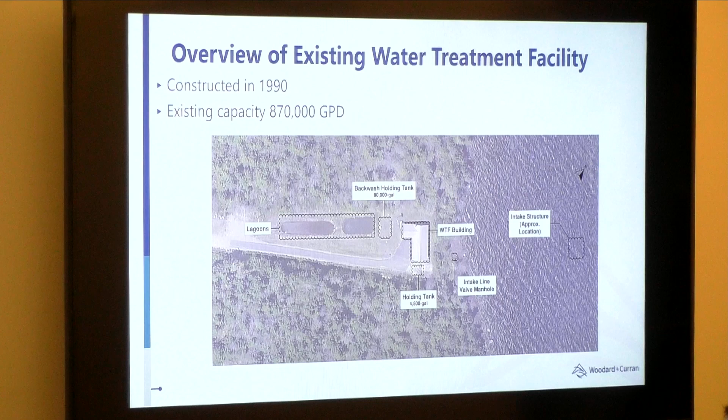There's a lot here, but just to quickly go through it, water comes in from the lake. You have 2 raw water pumps. Those are in the building. You pre-treat with a coagulant, which aids in your clarification and filtration process. You have ultraviolet light primary disinfection. You add fluoride, chlorine for a system residual, and then adjust pH for corrosion control before the water goes out to distribution through a series of tanks, ultimately before it comes into town.

The backwash process, which we'll get into in much more detail, consists of a holding tank and 2 lagoons. You store backwash on site because you're about 7 miles from sewer collection. So on-site management of backwash will be an important consideration of this project moving forward.

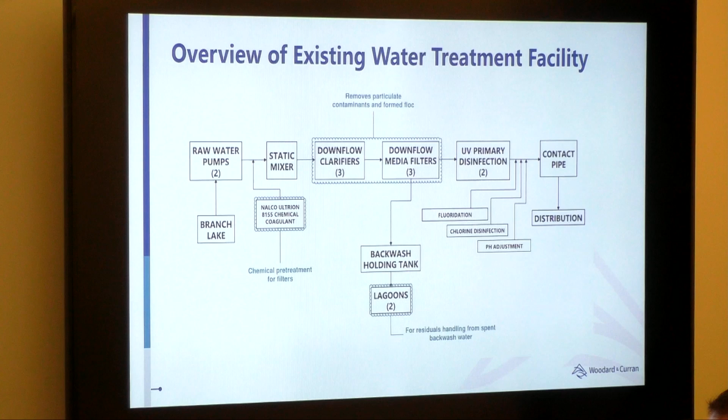And stop me at any time. I'd rather talk with you than talk to you.

So, for the new project, you have everything going on out there from deterioration of the existing structure. We'll show some pictures of that in a moment. Pretty poor ventilation system, which is leading to much of that deterioration. You have some confined space concerns, particularly with your raw water pumps, and if you have to replace or maintain those raw water pumps, which we've had to do very recently.

The lagoons are undersized. We're going to get into that in more detail. That's leading to one of the compliance issues you have at the site, which is you have an unpermitted discharge from those lagoons back into Branch Lake. And then as of late, and Charlie mentioned this, we've had rising disinfection byproduct levels. So we've exceeded the maximum contaminant limit, that's the MCL. And Morgan will get into that in a little bit more detail.

The other primary need for the facility is to just support the growth in the community. The lack of reliability out there currently is a pretty big concern, I know, for you all, and just supporting the growth you want to see here in the community.

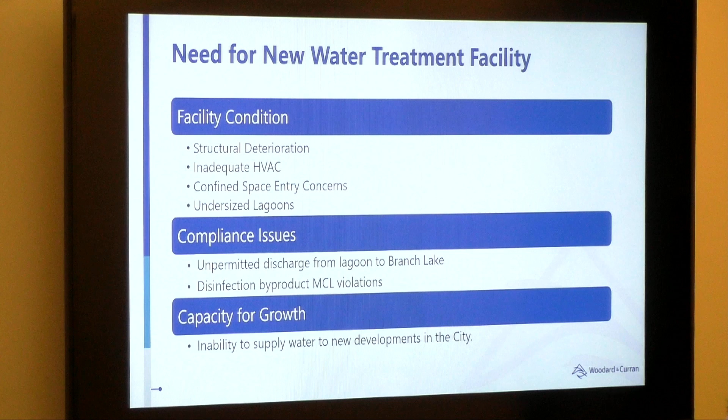A little bit just about existing plant conditions to just kind of drive the point home. You have everything from spalled concrete, the significant corrosion you see on the door there is largely due to the inadequate ventilation in the structure. The same chemicals in the atmosphere that are corroding that door are doing things like making light switches not work and causing problems with the electrical system.

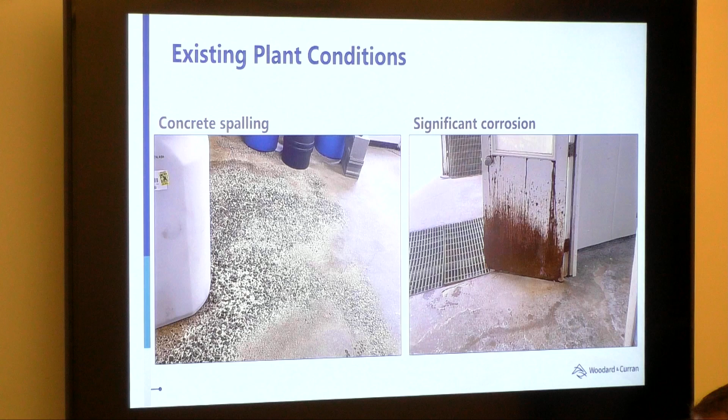It's deteriorating most of the coatings in the building, so paint coatings are there to protect what's underneath it. You lose the paint coating, you start to deteriorate the material underneath. The filters are starting to see leaks in them. Most of the piping is leaking out there. Just a building that's pretty tired at this point.

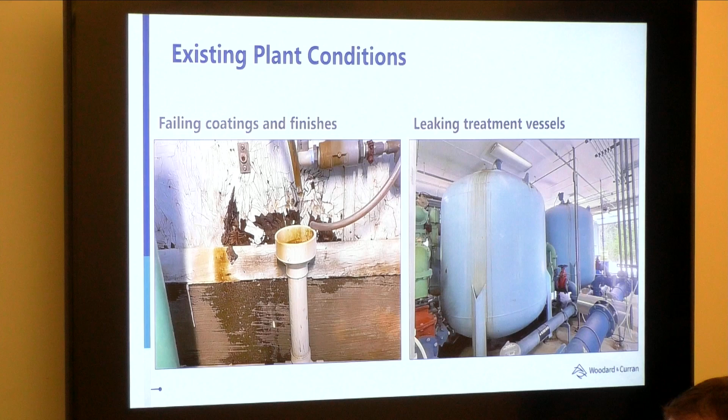So to talk about the lagoons for a second, I looked back in my email before coming here today. The first email I had on the lagoons was 2010. So that's kind of when I started thinking about these lagoons. When the facility was first designed and constructed, the plan was to recycle 100% of the backwash.

The way the system works is just quickly, you're filtering the water from Branch Lake. When those filters start to become clogged, you backwash them to clean them. That backwash water goes to these lagoons. The plan was to settle that water in the lagoons and then recycle that water, 100% of it, back through forward flow of the plant.

A couple of things have occurred over the years that have challenged that approach. One is the filter backwash rule, which limits the amount you can recycle through the plant to, I think it's 10%, but I might have that wrong. The other thing that's challenging you is the promulgation of the enhanced surface water treatment rule, the disinfection byproduct rule. Those all require much more optimized removal of pathogens, which means you're backwashing more frequently.

And ultimately what it's led to is the lagoons, as they're sized, cannot handle that volume of water. So the lagoons fill, they saturate the area, and in this corner here, we're seeing pretty much a steady stream of water flowing back down to Branch Lake. Branch Lake is a Class A water body. You cannot permit a discharge to it. So that is the unpermitted discharge.

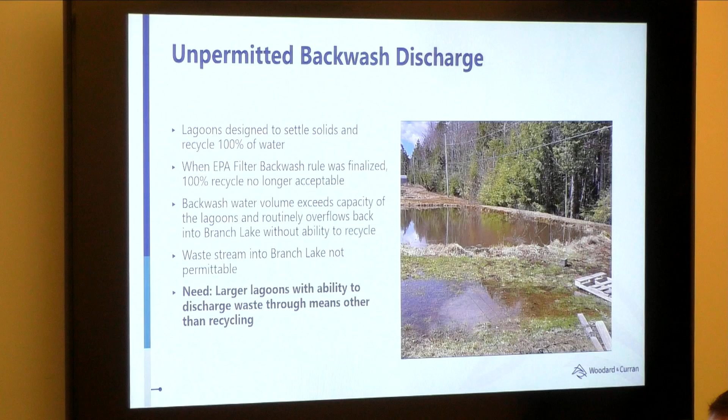I think this is where Morgan takes over. But before I leave, are there any questions for me about any of that? Is there enough room out there to have two very large lagoons? Do we have enough land?

Yeah, so several years ago, we went through a process with the Frenchman Bay folks where we did a land swap. So we took some land out of what was in the original conservation easement, traded them some land that we didn't need for this project. So we, at this point, feel we have adequate land for both the lagoon construction and the spray irrigation system.

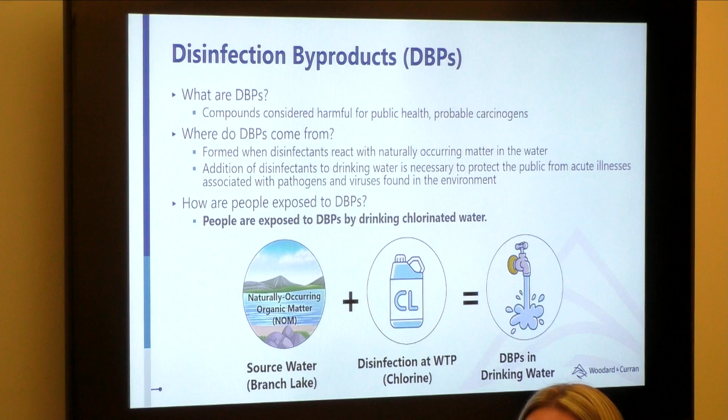So the reason that we care about DBPs, the EPA, I think since the early 90s, has been watching these chemicals and regulating them. They're public health hazards and probable carcinogens is how they're labeled. So that's the reason why we care about DBPs.

So the limits that EPA has set for DBPs, for those HAAs, it's 60 parts per billion, and THMs, it's 80 parts per billion. The way that those are measured is the city has two locations that they need to sample from 4 times a year. So it's a quarterly sample, and you take the running annual average for each location. So the sum of the past 4 quarters divided by 4 is the number that you're comparing to those limits. So what that means is that you could have a result that was higher than the 80 parts per billion, but as long as the rest of the year you were below that, you would still maintain your compliance limit. So that's just what that running annual average does for you.

So the city of Ellsworth typically sees their highest values in the fall and the spring. The reason behind that is that's when organics are highest in the water. Branch Lake goes through a turnover during those periods as the temperatures change and things get mixed up. So you're pulling in more organics into the plant, and that's really feeding the DBP formation.

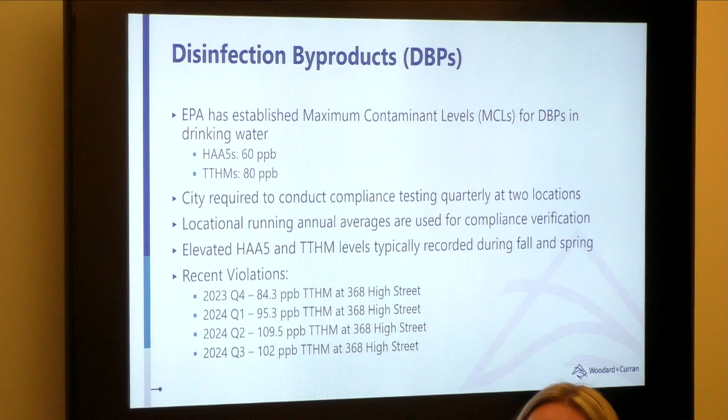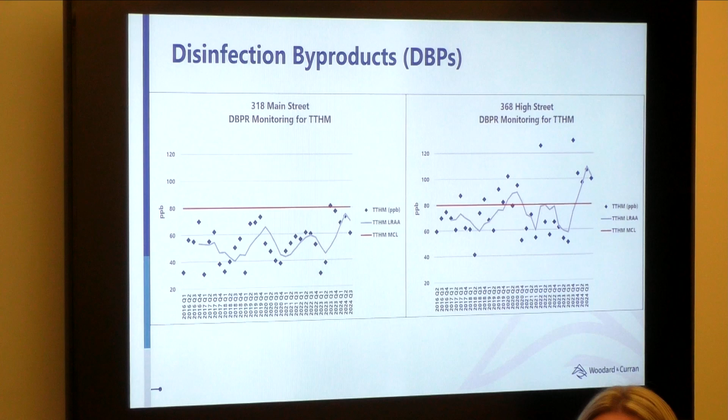So these graphs show the results back to 2016. So the dots are going to be the individual results, and the gray lines are going to be that running annual average. And the red line is going to be the EPA limit. So you can see that specifically at 368 High Street, which is one of your 2 locations for monitoring, it's sort of been a continuous issue or close to an issue for quite some time.

Now, the city has done a lot since then to try to address this problem. So way back in 2009, the city replaced the clarifier and filter media. So again, the goal of that is to reduce the organic matter that's going into that equation. In 2013, the city installed UV disinfection. And so before that time, they were using chlorine as the primary disinfectant, and so it required a lot more chlorine to be added at the plant. When they installed UV, it allowed them to cut back on that chlorine dose, just using it to maintain a residual in the distribution system. So now we're lowering that chlorine component of the equation. And then in 2020, the city installed chlorination at the High Street water tank and the State Street or the high school water tank.

So what that helps with is to cut back on the time part of that equation, because we can now dose less chlorine at the plant and add it at the tanks instead, so we're still maintaining the necessary residual that we need to prevent viruses and all those bad things from forming, but without all the time of having that sit in there right from the plant. The other part of that was adding mixers, which also helps reduce that water age and prevents stagnation in the tanks that can also lead to issues.

The city has also been working with the filters that they have and the capacity that they can to try to maximize and optimize how much they're removing, but they're limited with the infrastructure that they have now. So long story short is that the city has done a lot of work to try to reduce the different factors that go into the DBP formation, but with the state of the plant and everything else that's going on, it's really the filters need to be a more robust, more well-suited material to treat the water in Branch Lake, to reduce the organic material.

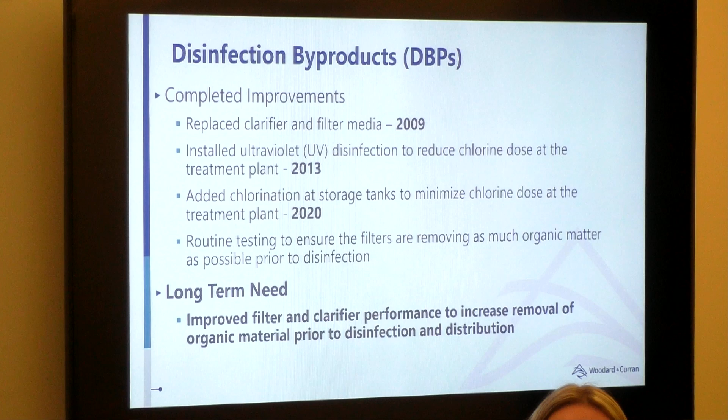We've sort of done what we can with the chlorine, and the age you don't have too much control over, but really reducing that organics is going to be what's critical to getting back in compliance for that. All right, so now we'll talk a little bit about growth.

So this chart, the blue lines are just your daily flow from 2021 to 2024. And the orange line there is what the current max capacity of your plant is. So you can see there's been one instance where you exceeded that, so things were running higher than they should have been, and again, your filters were running at a rate that's higher than what they're rated for. And there are several points where we're close to that point.

The other thing I just want to note is when we talk about plant capacity, and we say 870,000 gallons, that's with everything running. So when we design a new plant, we like to build in some redundancy to that so that you can have a pump down and still be able to meet your maximum demands. Or you could take a filter down for maintenance and you're not worried about meeting the demands of your customers. So that 870,000 is with everything running. So you also have a layer of sort of vulnerability there.

Your average day flow for the past 4 years has been 483,000 gallons, but you can somewhat see on this chart that that is trending upwards. That's a combination of just growth in the city, additional demands from Jackson Lab, so several factors there, but there is definitely a trend upward in your average and max demands.

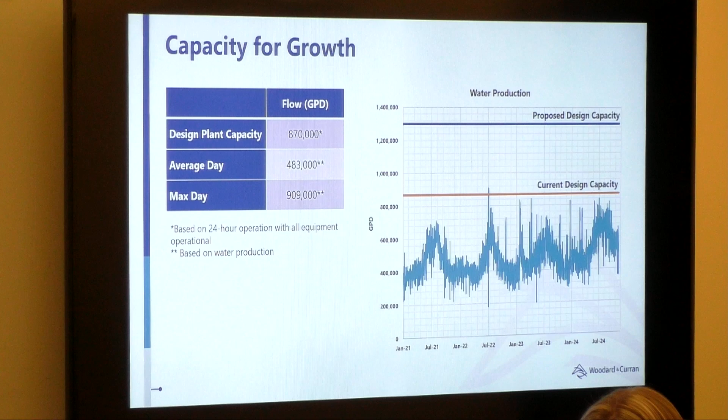All right, so getting into what Nate was discussing a little bit in the proposed layout. So one thing that we need to keep in consideration is the current plant needs to operate throughout construction of a new plant, because that's your sole source of water here. So leaving that building as it is and constructing a new treatment facility on the existing property, but a little bit further up on the driveway in a cleared area, is what we're envisioning.

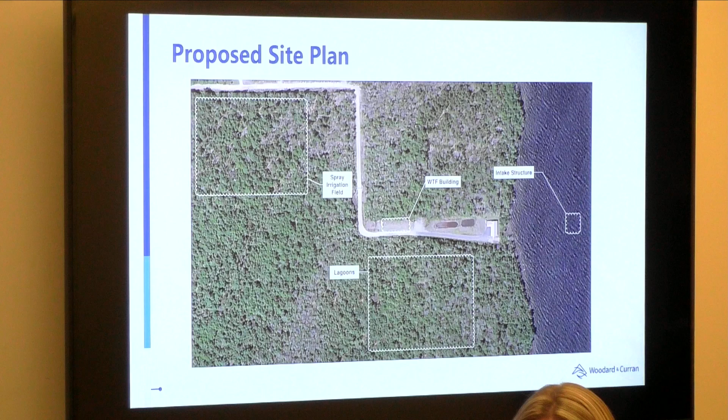And the lagoons and spray irrigation fields that are outlined in white here are the areas Nate was referring to that were taken out of the conservation easement to allow for this project to move forward several years ago. Okay, so now I'll just talk a little bit, I'm actually gonna skip that one for now, sorry.

Okay, so getting into the work that's been done so far, back in July of last year, we worked with Reggie and his team to complete a bench scale study of the existing water. And the goal of this was to look at different coagulants, different chemicals that we can add that would help us improve the organics removal. So when we look at that, we're looking at which chemicals are binding that organic material into bigger blobs that are easier to remove. So we worked with a piloting subcontractor out of Massachusetts to do this work, and they evaluated 4 different chemical coagulants and one process that's called MIEX, which is more of an adsorption process.

It's a little bit different. Of those 4 coagulants, we looked at 1 iron-based one, which is ferric chloride, and 3 aluminum-based ones, including the one that the city currently uses. There's a lot of words on here, but to summarize, the ferric chloride is really what showed the most potential. The most organics removal, the lowest DBP formation potential, which is something that they can measure, and just performed really well in the water. So that was really valuable data for us, as it's a pretty significant change from what the city's currently doing, but as we move forward into what sort of treatment processes we're going to be looking at for the new plant, a very good data point.

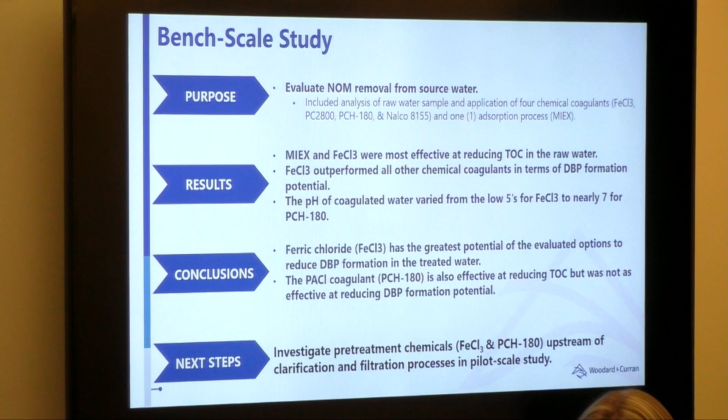So that bench scale testing involved us sending water that the city had collected to a lab where they added these chemicals and tracked these things. And the next stage of this is piloting. So that would involve bringing the treatment components that we envision for the new plant to the site, running the actual city water through it with the right chemicals on a smaller scale, so we can measure exactly how it's going to perform with the water. So after looking at the results of the bench scale study, and we've been sampling and tracking water quality from Branch Lake for about 2 years now, we've developed some proposed treatment trains that we're looking to pilot.

So the first step of that is the chemical feed. So we're looking at the top 2 coagulants from that bench scale study, one of them is the aluminum-based and one of them is the ferric chloride, as well as pH adjustment to get the water within the optimal pH range for those chemicals. The next one is sedimentation with inclined plate settlers. So this process is, as we've formed these blobs of organics, now we're going to let them settle out. By doing that on inclined plate settlers, we can minimize the footprint that we need because we're maximizing surface area over footprint. And it's just a very effective way at getting out some of those larger components. And then we move into filtration, which takes care of the rest that doesn't settle out.

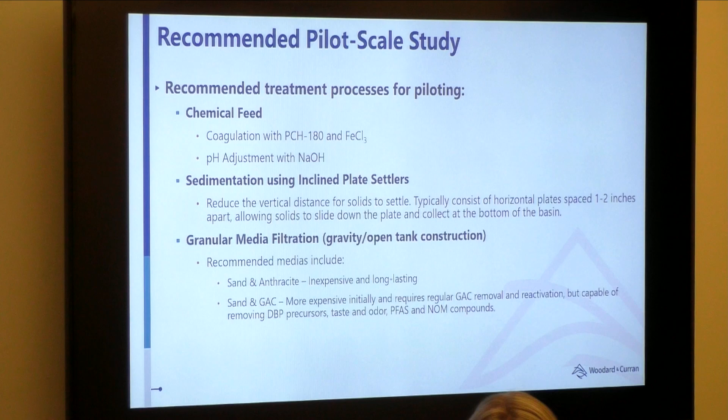Right now the city utilizes pressure filtration vessels, which are closed vessels, and we're looking at more of an open filter, which gives you a much more robust removal. So 2 different medias for that. One is a sand and anthracite, and one is a sand and GAC, which a lot of people know right now from the PFAS world. Branch Lake does not have a PFAS problem, but GAC certainly gives you an additional removal component for things we might not even know about yet. So this just shows what I described in more of a flow diagram.

All right, before I turn it over to Brent for funding, if anybody has any questions about all that fun technical stuff, I'd be happy to take them. I have questions. Yeah. Okay, have we seen an increase in the turbidity of the lake, the solids in the water body itself? Has it been increasing over time, or is it pretty standard for lakes of its kind? I would say for its season, it changes year to year, which, Reggie, if you have any sort of thoughts, but I know this summer I don't think was a terrible one. No, so the turbidity levels in the lake when they come into the plant have all been maintaining a 0.3. I mean, that's been the max, but we're backwashing a lot more.

Because I just wonder if we've seen an increase in that with development around the lake. The follow-up would be, is there anything upstream of the lake, like non-point source pollution control on Lake Shore, that could help as well? I was just gonna say, one of the things we've seen, not even just in Ellsworth, but throughout this region, is more to do with the climate patterns that we're seeing. So the really dry spells and then heavy rains really impact that turbidity and water quality in lakes throughout Maine. Yeah, I think it was 2 summers ago, everybody in this area, Bangor, Brewer, you folks, were all suffering with really strange water quality events, largely all tied to heavy rain events following periods of dry weather. So those plague you. If those increase, they'll plague you more.

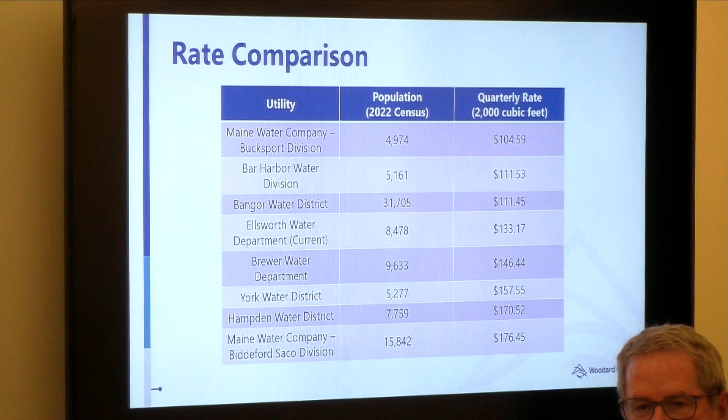Is there a suggestion to step the increase gradually over time for the usage rate? I think you might wanna have maybe a larger step and then kind of balance that out over time. You're allowed 1.5% or 2% average, right? 1.5%. You can do 1.5% without going to the PUC. And so what I would suggest is get it to the point that you think you can cover your debt, and then make sure you do those 1.5% on a yearly basis so you don't fall behind. And so we'll model out what that looks like.

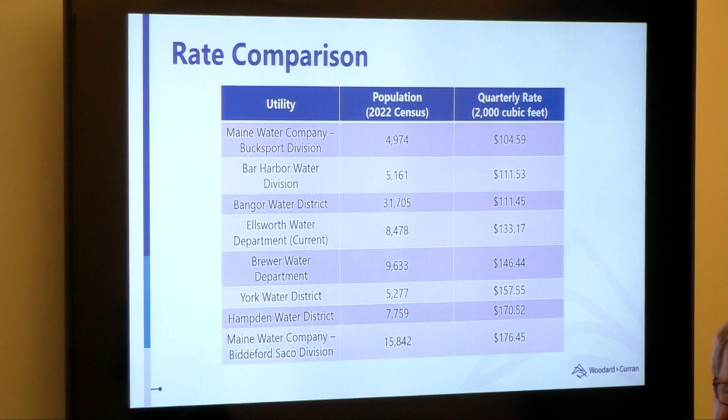And if you think back to the slide with the drinking water program funds, there's gonna be 3 separate loans in there, 3 separate awards. And the way their money works with the bond bank is your first payment is due a year after you close the loan. So you're probably 3 years away from closing that first loan, 4 years on the next one, 5 years on the last, so you have a lot of opportunity in there to stagger that 41% projected rate.

Then there should be some bond retirements during that time as well, correct? Has that been looked at? Yes. Is that already taken into consideration with the rate? Okay. Here, you've got a couple that are coming up within that timeframe. So are those calculated, though, in the necessity for the 41%?

The first one is the 2025 one, yeah. The 2028 one is not. 2028 is not, so that's significant. And Reggie already started doing the 1.5; we did 1.5 last year, and we're looking at post 1.5 this year. So we're already trying to be proactive with reducing whatever that is going to end up being.

So do we have any other capital projects coming up, like tank work? Yeah, we have pump work. The Sawyer Road lining project starts in the spring. But we've already got that money, correct? Yeah, I just don't know what the debt service is going to be off of it. Right? We've been awarded the money, we have not closed the loan. So you don't know what the interest rate's going to be yet, so you don't have an amortization? It's not included in this, correct?

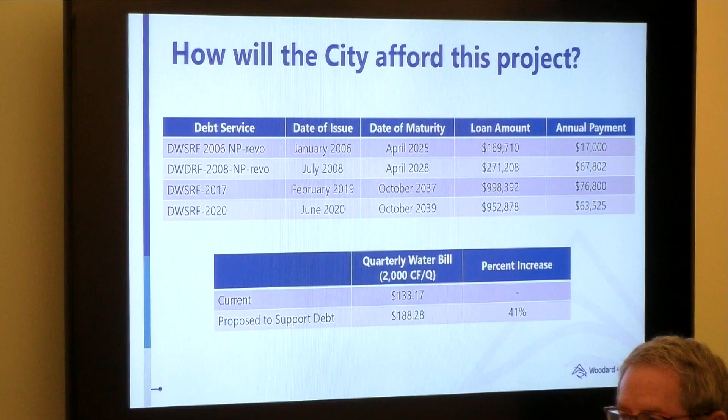Well, existing tanks are all set, maybe, but there's still the discussion about whether or not there's a new tank for a new pressure gradient, and I don't know that decision has been made. Once we finish the modeling and figure out the amortization schedule, we're going to be revamping the infrastructure planning, which will include all these pieces too.

As we discussed in the last budget session, let's go forward with the 1.5% without PUC. Do we want to stagger up ahead of time, or just keep at it so we don't go above the PUC without having to go to them? Or do we want to start building up a little more so all that debt service doesn't hit at once? That's a question I'd like to discuss more. Maybe we don't have all the information right now, or do we just keep staying at 1.5% until this requires us to do more?

And will this model take into consideration what the city pays for hydrants? Because we have made up some of that with taxpayer dollars. Revenue? So the city pays for hydrants, and that's outside of the rate? Yeah, that's factored into the 41%. The terms of the loans are generally compared to the useful life, 20 years? You can do less; that's the max they have.

It would be good, when this all comes together, it's a $20 million project, to look at the effect of the debt service with what we know as capital projects in the next 10 years too, so we know what we really are affecting. And I think we need to put in there what that debt is, and do better modeling on what the growth might be, so we can get a handle on what that percentage rate increase would be.